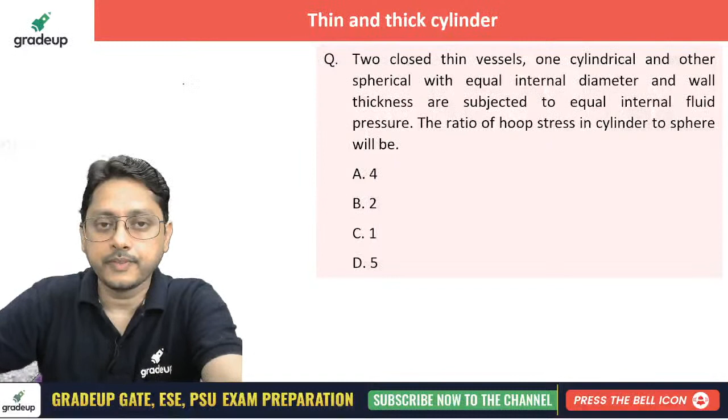What is the hoop stress? One should always remember: for a cylindrical vessel, what is the formula for hoop stress? If you're getting confused, is it PD by 4T or PD by 2T? Remember that hoop stress is always more. So hoop stress for a cylindrical one is PD by 2T, and the longitudinal stress for the cylindrical one is PD by 4T.

For the spherical one, it has the same longitudinal as well as hoop stress. Spherical has the same value in both directions. So whether you talk about longitudinal or hoop stress for spherical, it has only one value, that is PD by 4T.

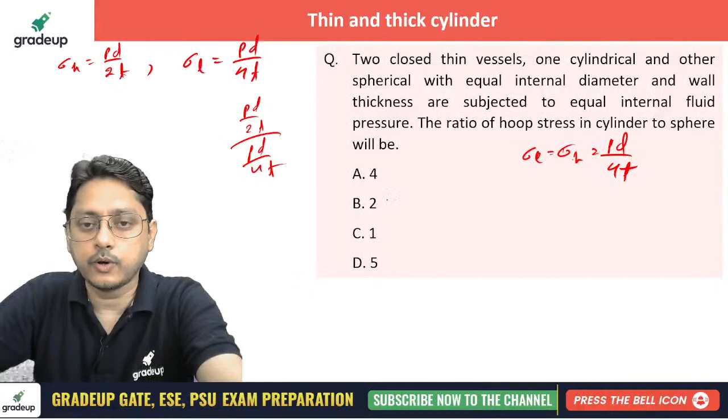Now what is the ratio of hoop stress in cylindrical to spherical? Hoop stress in cylindrical is PD by 2T, divided by PD by 4T for spherical, and finally you get 2. Yes, absolutely correct.

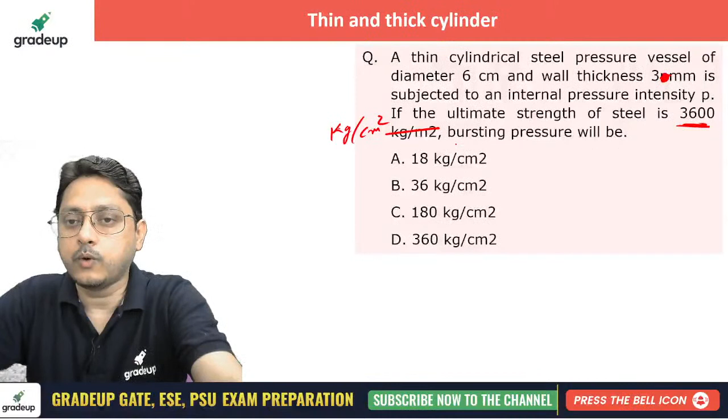A thin cylindrical steel pressure vessel of diameter 6 cm and wall thickness 3 mm is subjected to an internal pressure intensity of P. If the ultimate strength of the steel is 3600 kg per centimeter square, then what will be the bursting pressure? What is the maximum internal pressure which you can apply there?

Just now I told you that for a cylindrical vessel, the hoop stress is nothing but PD by 2T, and the longitudinal stress is nothing but PD by 4T.

Now the cylinder, if you are talking about, will be made up of only one material. So the problem is that if it's made up of only one material, either you go for the hoop stress or the longitudinal stress over the element here. The failure will occur only at 3600, that is the ultimate maximum which you can apply. So if you apply any pressure, the maximum that develops is your hoop stress. So let us do the designing utilizing the hoop stress only. Are you able to understand that?

If you increase the constant pressure, with diameter and thickness all the same, between hoop and longitudinal, always the hoop stress generates more for a constant pressure. For the internal pressure, always the hoop stress will be generated more. So do it for the hoop stress only.

Now instead of the hoop stress, keep your ultimate or final value which you can maximum apply. The maximum stress which you can apply is nothing but 3600 kg per centimeter square. The internal pressure is asked to you.

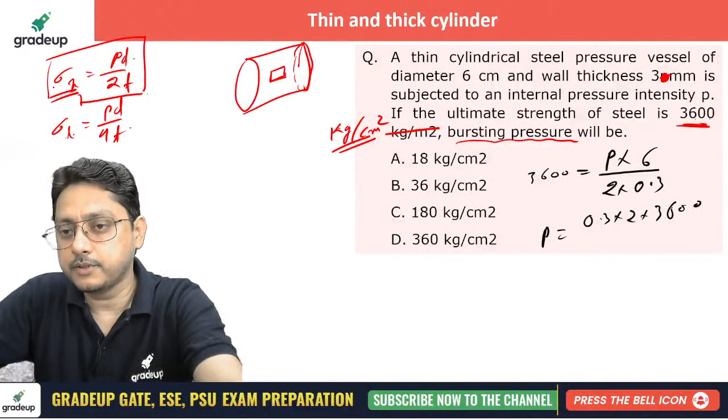The dia is given as 6 centimeter. Dia is 6, right? Okay, 6 centimeter divided by 2, into 3 mm is the thickness, you can write down as 0.3. If you calculate from here how much you are going to get: 0.3 into 2 into 3600 divided by 6. So you will get, 360 kg per centimeter square.

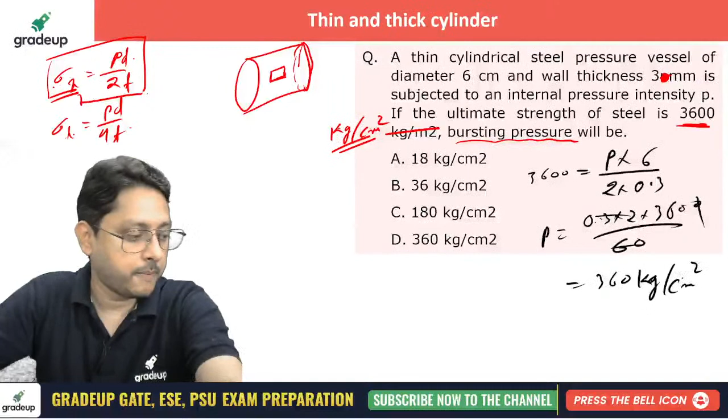That's all. So remember that it is always to compare with. These are the easy problems. Now try this one. These were the easy problem, and before trying it, please share it.

A 10 mm thick cylinder. Now this is a thick cylinder shell made up of steel, has a maximum permissible tensile stress of 140 Newton per mm square. The efficiency of the longitudinal and circumferential joints are 65% and 35% respectively. Determine the maximum permissible dia of the shell if internal fluid pressure is 3.5 megapascal.

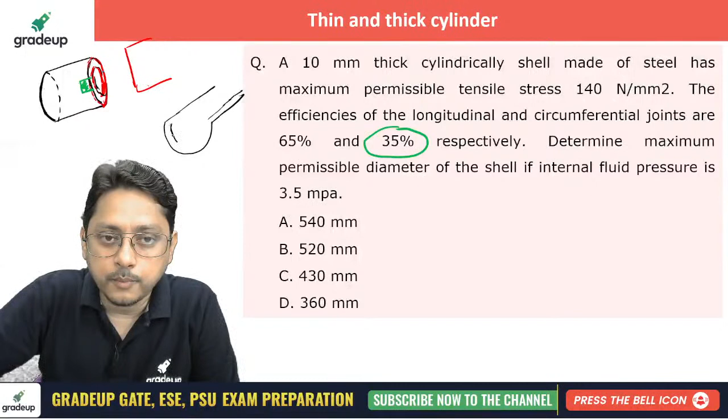And if you are talking about the hoop stress, now if you are talking about the hoop stress, just let me draw another diagram. If you are talking about hoop stress, then a longitudinal joint efficiency matters to you. Are you able to understand this? First of all, you should understand that a longitudinal joint efficiency matters to you for hoop stress, and a circumferential joint efficiency matters to you for longitudinal stress.

So if you consider any element here, this is one of the elements you are going to consider, maybe here. Now here the hoop stress will be transferred completely, up to the material strength, if you have a nice longitudinal joint. Are you getting my point? Now if I'll be writing down the equation, I'll write it down now.

The hoop stress, now this is the permissible. Instead of the permissible, if you write down here, but see, this is permissible, right? Hoop permissible. The permissible for a material is same for both, since it is made up of the same material. Of course, the material's permissible limit will be the same.

For the hoop, I will multiply with the efficiency which is there in the longitudinal direction. So efficiency in the longitudinal direction is the permissible limit you have now. And for the hoop, you already know that is PD by 2T. Are you able to understand that?

Another equation, if you write it down, is your longitudinal stress for the permissible. These are same. Permissible limit for the hoop and longitudinal both are same, right? Now here you will be writing down the efficiency which is there in your circumferential. That is now PD by 4T. Use these two equations. Are you able to understand that? Please let me know.

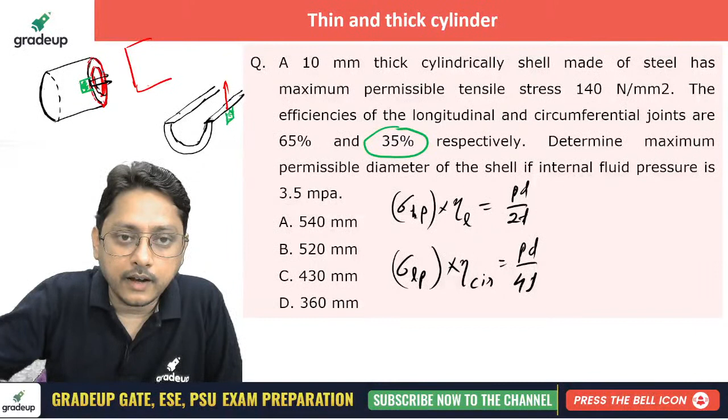Very important. This is your element. Over the element, here you have a longitudinal stress, and over this element you have a hoop stress. This is sigma H and this is sigma L. Is it clear? See, solution is okay.

One can do the solution. The main thing is whether you are able to understand it or not. Now, just do that one.

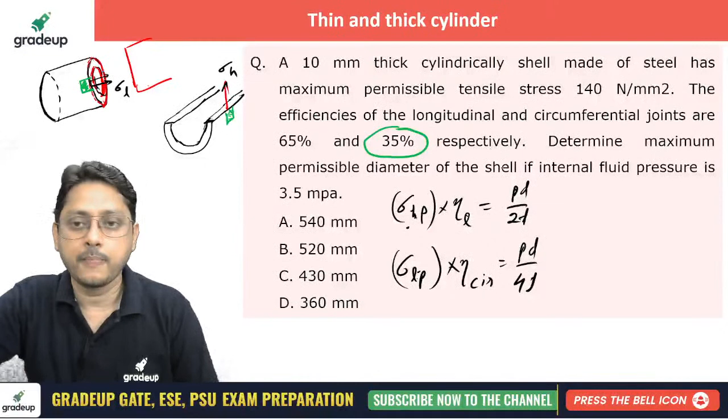That's simple. A 10 mm thick cylindrical shell made up of steel has maximum permissible stress of 140. Put 140 here, 140 here. Efficiency you have given here and here. Then you have to determine the maximal permissible diameter. The diameter you will now just calculate. I'll calculate just now.

First keep it in equation 1. So permissible is 140 multiplied by efficiency in the longitudinal direction, which is 65%. Do not get confused with the longitudinal and circumferential word. Efficiency in the longitudinal is 0.65. That is the maximum stress which you can apply in the hoop stress.

This is your hoop stress. And this is your longitudinal joint. Here is your longitudinal joint, either maybe through welding or maybe some kind of arrangement, right?

Into 0.65. Then pressure, internal pressure given as 3.5 megapascal. I will not change it because it is Newton per mm square, into D divided by 2 into thickness, given as 10 mm. Now you calculate how much D you are getting from here. That is 140 multiplied by 0.65 multiplied by 20 divided by 3.5, and you are going to get 520 mm.

Use the second equation also. Keep the values here. That is 140 into 0.35 equals to 3.5 into dia divided by 4 into 10. How much will you be getting here? That is 140 multiplied by 0.35 into 2, divided by, you will get 560.

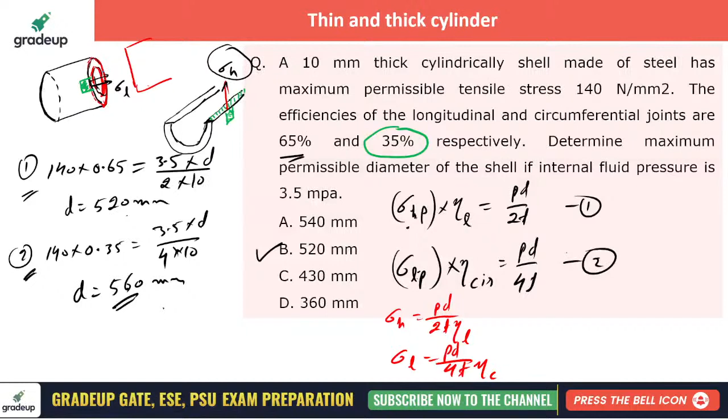Okay, next one. Here is your next one. What is that?

A thin cylindrical shell of internal diameter D and thickness T is subjected to internal pressure P. The change in diameter - can you do this one? What will be the change in diameter?

Okay, see here, the change in diameter—actually you are searching for delta D. I'll say that is the change in perimeter.

Suppose this is your cylindrical shell, and consider one element over here. That element will have a hoop stress as well as longitudinal stress, right? Take the element out. This is the state of stress it has. In the diameter wise direction, it has hoop stress, and in the longitudinal side, it has longitudinal stress.

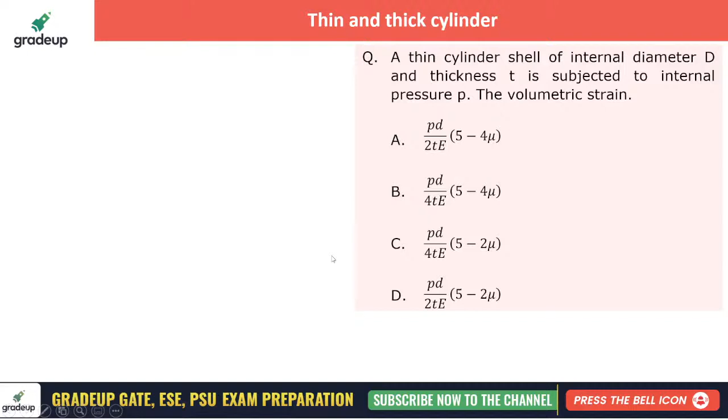Now they all are like—what will be the volumetric strain? Can you tell me which one is correct here?

Yes, I'm just waiting for your comments. What will be the volumetric strain? Yes, Rahul, actually you are correct. Yes, all of you are, I hope, correct. All of you are correct.

So if you find the volumetric strain, this is twice your diametric side and a single side of your longitudinal side, right? That is nothing but the circumferential strain you have. So already you have calculated the circumferential strain, which is PD by 4TE. So twice of that is PD by 4TE.

Times (2 minus mu). And what is your longitudinal strain? What is your longitudinal strain? So your longitudinal strain will be—just a moment, did I say something wrong?

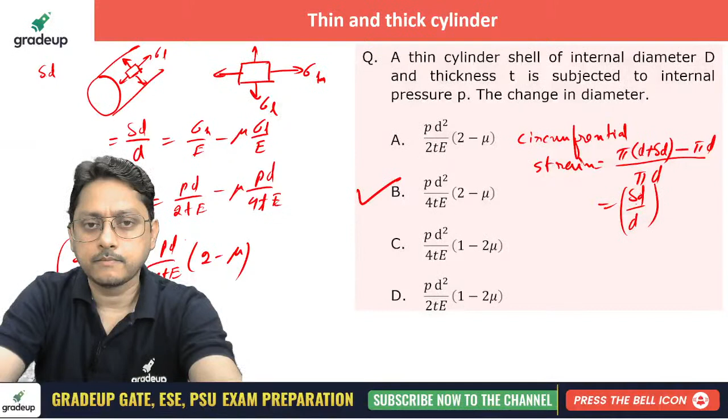So simply if you do this one, twice of that hoop strain, how much do you have? What is your longitudinal strain? Strain in the longitudinal direction—what is that one?

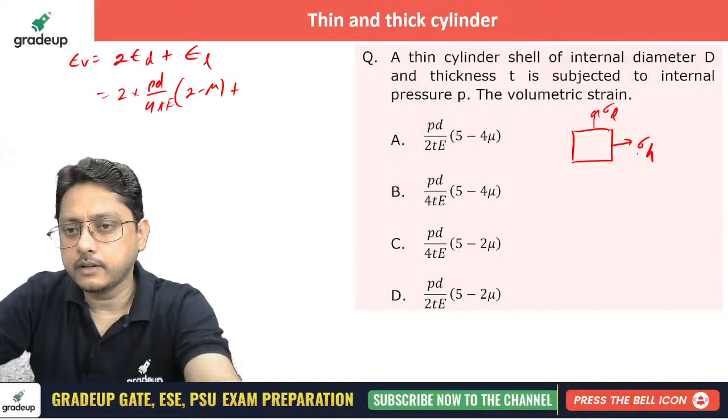Then I think you need to calculate that one also. If you have a longitudinal one here and a hoop here, longitudinal strain will be sigma L by E, minus mu times sigma H by E. Longitudinal stress already we have, that is PD by 4TE, and minus mu times sigma H by E, that is PD by 2TE.

And you will be getting PD by 4TE times 1 minus 2 mu. This is your longitudinal strain, right? So longitudinal strain will be PD by 4TE, and that is also good. You have seen what is the longitudinal strain, and how you are getting it here.

PD by 4T, you keep 1 minus 2 mu here. Just calculate and simplify this, and you will get PD by 4T times 5 minus 4 mu. Simplify this one, that's all. PD by 4TE, see here, 2 times 4 minus 2 mu, plus 1 minus 2 mu. See, 4 plus 1 becomes 5, and 2 times 4. Did you get that? Any doubt, please let me know.

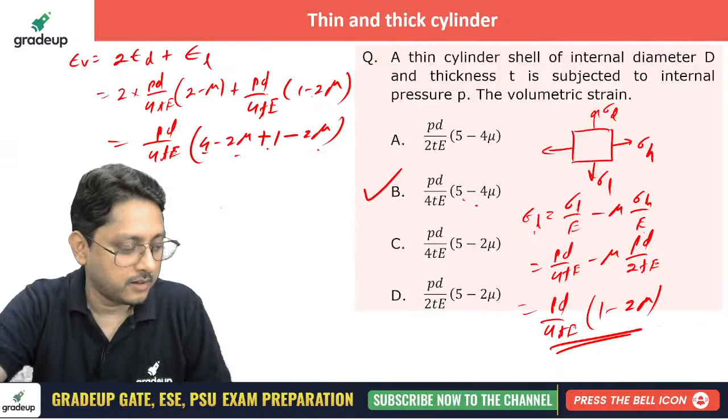Now what about this one? For a thick cylinder, the radial stress, see this one, I generally recommend, this is Lame's equation. This is just so that you remember it. Based on this, sometimes you may get the numerical also. This is your Lame's equation for your thick cylinder.

What is the equation of radial and hoop stress? Can you tell me? This is first one, please do remember, because now we are going to solve the problem based on this Lame's equation. Yes, Rahul, absolutely correct.

The first one is your radial stress. Radial stress, you know that already, right? If you have a thick cylinder, the radial stress in the direction of radius, internally, if P is the internal pressure, the internal radial stress will vary. How will the radial stress vary? I hope all of you have already studied and gone through this.

Suppose this is the internal pressure. The radial stress, if I am talking about the internal one, will be maximum here, that is nothing but P, and it will be 0 at the outer one. Actually 0 means atmospheric, but we are considering it as 0 as a basic assumption. So now internal pressure is maximum internal radial, and outside you have 0. That will make your numerical easy, because it provides the boundary condition.

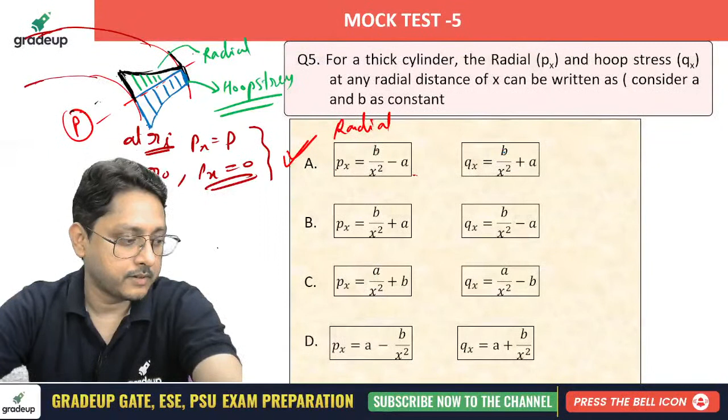Simply use these boundary conditions, calculate the value of A and B, and whatever is asked can be presented. That is the kind of problem you can get for the thick cylinder. Are you able to understand this? Now here is the problem.

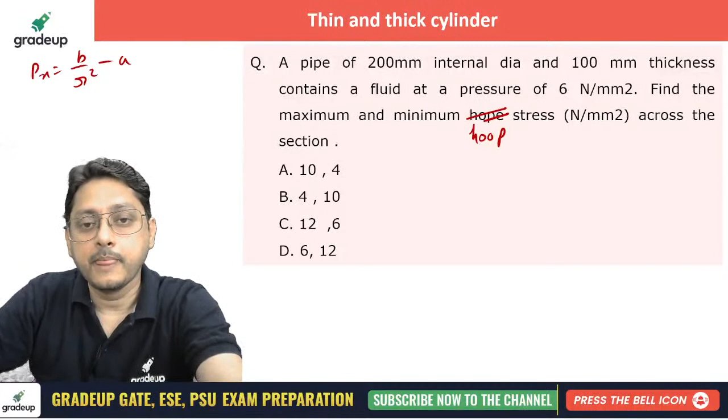Can you do the calculations? I told you the radial stress is nothing but B by r square, where r is varying from internal radius to external radius, minus A. That is your radial stress calculation. And the hoop stress I have identified by Q, someone can write it as F also, doesn't matter, B by r square then plus A. That is for hoop stress.

What we'll do now? He's asking about the maximum and minimum hoop stress. Can you calculate that? The way I told you, use the boundary conditions from the previous slide to calculate the value of A and B, that is Lamé's constant.

He's asking what is the maximum and minimum stress. Calculate the values by using this. So what will be the value of A and B? So I can say that these are the diameters they have given.

So at internal radius, r equals 100, since you have a 200 mm internal diameter, at r equals 100, your radial stress px will be how much? Internal pressure whatever you have, that is 6 Newton per mm square. Agree or not?

And if the thickness is 100, the outer radius will be how much? Outer radius will be 200, right? At r equals 200, what will be your radial stress? That is nothing but 0. Now use these two in your equation px.

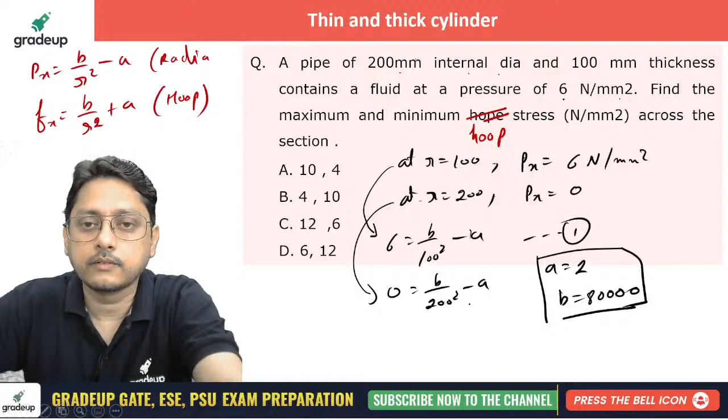So now calculate your hoop stress. Hoop stress will be, what is the value of b? That is 80,000 divided by r square. Now at the internal radius you will be getting maximum, so I should write down maximum hoop stress.

Max. So if you are going to get the maximum one, use the internal radius, that is 100. So 100 square plus a value is 2. How much will you be getting here? Maximum 10 Newton per mm square. 100 square, the 1 2 3 4 will get cancelled, 8 plus 2, that's 10.

And minimum hoop stress you will get how? 80,000, same constant value, divided by outer radius. Outer radius is how much? 200 square, since 200 mm is the outer radius, plus 2. How much will you get? Here you will get 2, plus 2, that's 4 Newton per mm square.

Now the values are 10 and 4. The maximum and minimum hoop stress are 10 and 4. If you have any doubt, please let me know. Are you able to understand this?

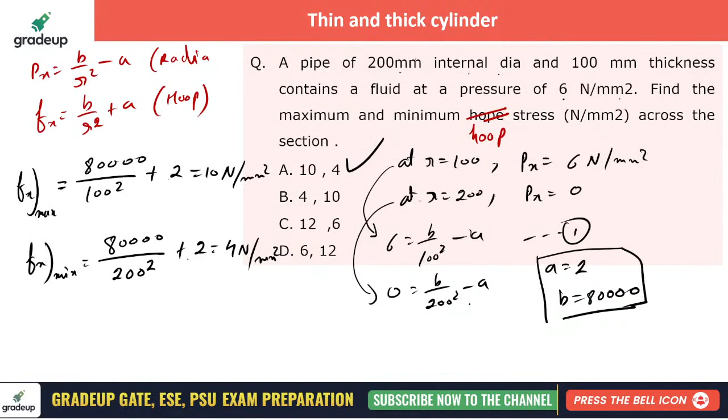Once again, you will get the same type of problem. I have another one, can you do this? Here also this is hoop stress, not radial. Now this is the same kind of problem, same concepts will be required here. Instead of going for the same problem again, let's go for another problem with the same concept, it will be better.

Find the thickness of metal necessary for a steel cylindrical shell of internal diameter 200 mm, to withstand an internal pressure of 50 Newton per mm square.

Right, this is your 200 mm. Please use this one to withstand internal pressure of 50 Newton, and the maximum hoop stress in the section is not to exceed 150 Newton per mm square. So maximum hoop stress is restricted.

This time the boundary condition, the way he has provided here, you are now supposed to utilize that one. He has given the maximum hoop stress, right?

Find the thickness of metal necessary for a steel cylindrical shell of internal dia 200. You don't know what is the thickness here. Can you do that? Can you do this one? Try this one.

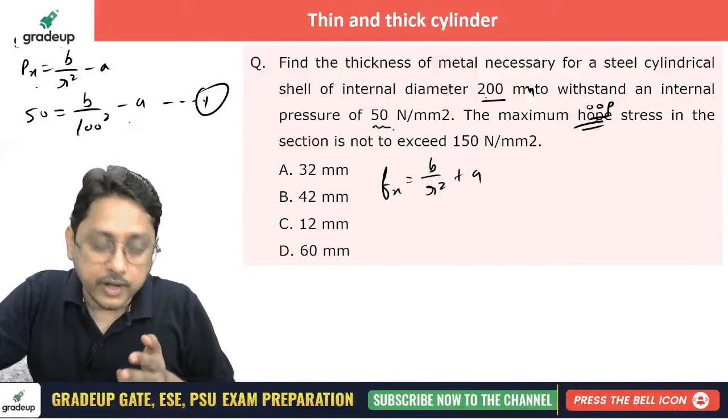Now you will be asking me, sir, can you write down another equation? If I write down another equation, B and A are unknown. If I write down only the other boundary condition for a radial stress, what will happen? See, B and A, two unknowns I have. Another unknown is our external diameter, that is outer radius.

I don't have the outer radius because I don't know the thickness of the material, right? So I will be having three unknowns. So only with the help of that boundary condition, which I told you in the previous problem, one cannot solve this problem. So that is why they are very smart. They have given another boundary condition, that the hoop stress in the section should not exceed 150 Newton per mm square.

See, it is not important for you how you are solving it. It is important that what is your approach. After reading out the question, what exactly you are thinking. So generate a nice approach for that one, right?

Now, the maximum hoop stress, that is why they have given that another boundary condition, right? Okay, you got it, 42 mm, that is great. So 150 is the final one, and where will the maximum hoop stress be? The maximum hoop stress will be at internal one, right? So B by 100 square plus A.

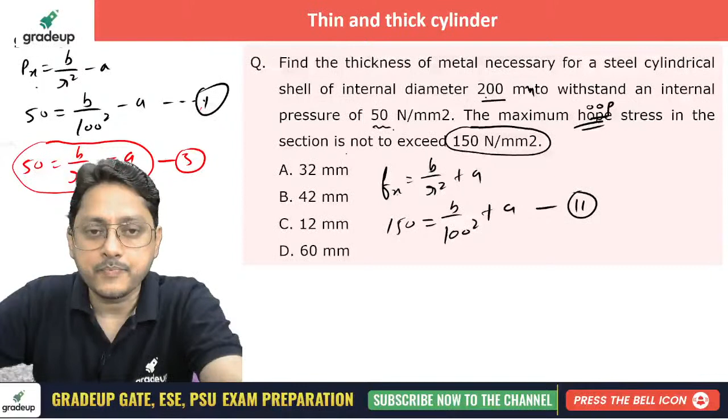Now here I can use these two equations. Are you able to understand why I have not utilized the equation for 50 equals to B by outer radius square minus A? I am not going to use this one. These two are not the equations to use, because by the red pen, whatever I'm writing down, try to understand that if I use this one, I have unknown B, A and R naught, and only with the help of two equations I cannot solve this.

So it is better to use equation 1 and 2. If you use equation 1 and 2, you will be able to get the value of A and B. Now what will be the value of A and B? Using equation, solving equation 1 and 2, what is the value of A and B you will get? Can you tell me what value of A and B you are getting?

What value are you getting? A is 50 and B is 10 raised to 6. Now use these two values.

Should I write it down? Use it in equation 3. You have 50 equals to B value. You already have 10 raised to 6 divided by R naught, which I don't have. Outer radius I don't have, minus A. A already you got as 50, and R naught, how much are you getting it here?

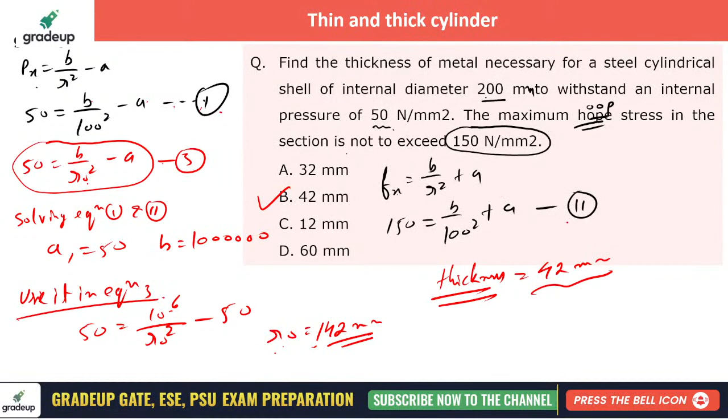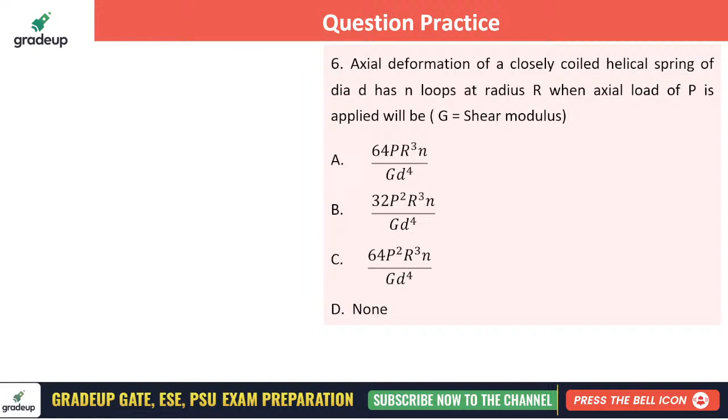Now what about this one? Axial deformation of a closely coiled helical spring. This is a very interesting problem. A closely coiled helical spring, how will you solve this one?

For that, remember a few things. If axial deformation is asked, or they may ask you the strain energy in the helical spring, sometimes I have already given that. So they can ask about the strain energy, they can ask about the axial deformation. How will you remember that? Because if you can remember the formula, that's great, that's always great. But if you have not remembered it, how will you use this one?

What will you do? Can you write down something? Yes, I hope you are doing good.

If you cannot remember the formula, follow my steps now. You know what is the strain energy for an axial bar? All of you please be ready. What is the strain energy for an axial bar loaded with axial force? Simple, P square L by 2AE. Correct, no? From here also I used to remember it, I don't remember this one otherwise.

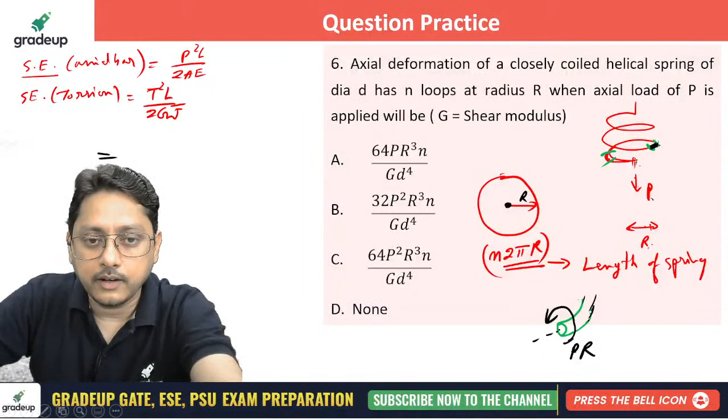Now T also I got it. Just keep all these values here, just put all the values here. If you'll keep all the values here, T is what? P into R, so it will become P square into R square. L is what? N into 2 pi R, N into 2 pi R divided by 2G.

And J also you can write it down. It is solid, no? So J is what? Polar moment of inertia, isn't it? That is nothing but pi d4 by 32. Simplify this one, how much you'll get? 2 will get cancelled, and you'll get 32 P square R cube, N divided by G D4.

This is what? This is your strain energy. Now, as per the Castigliano, the axial deformation.

See what Castigliano says, that force applied in this direction. You are interested to know what is the deflection, the axial deflection delta. If you want to know what is delta, as per Castigliano, delta, the axial deformation, is nothing but del U by del P. Agree or not? Del U by del P.

You do that one, del U by del P here. It will become 64 P R cube N divided by G D4. Now, either strain energy is asked to you or the axial deformation is asked to you, you will always be able to find it out. No need to remember that. Even though if you are forgetting sometime, you will be able to do this.

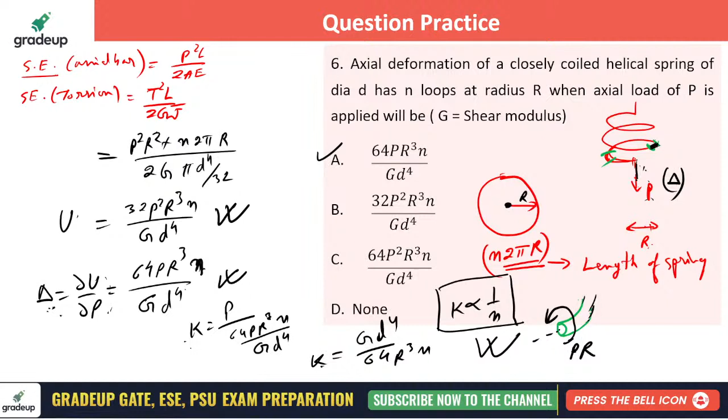I hope so. Now here is another problem you have. The buckling load for a column pinned at both ends is 10 kilonewton. If the ends are fixed, the buckling load changes to. These are just very easy problems. So P critical, you already know that. What is that? What is the formula? Remember it, try it.

What is the formula for P critical for the column? It is pi square EI by L effective square. If it is the buckling load for a column pinned at both ends, the length will be L itself, right?

Now P critical is given, that is nothing but 10. L effective is already L if it is pinned at both positions. Now if the ends are fixed, P critical dash is pi square EI, only L effective will get changed. If fixed at both ends, the effective length becomes L by 2.

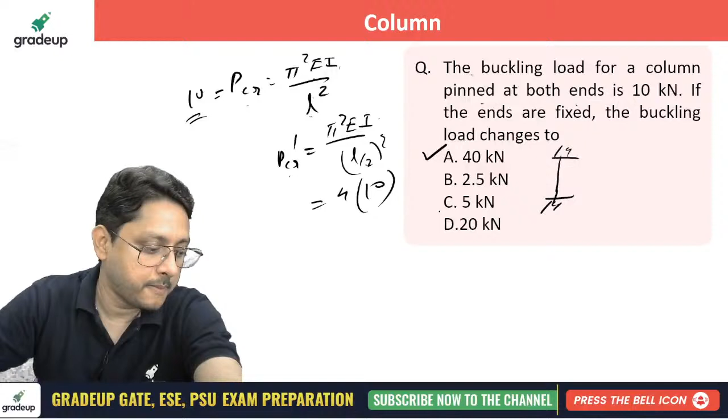Keep that L by 2 here, whole square, it will become 4 into pi square EI by L square. Now pi square EI by L square is already 10 given here. Keep that value 10, and P critical dash will become 40 kilonewton.

For a circular column having its end hinged, the slenderness ratio is 160. What will be the L by D ratio of the column? For that you should know the relation. He is asking the L by D ratio but has given the slenderness ratio. What is the slenderness ratio here?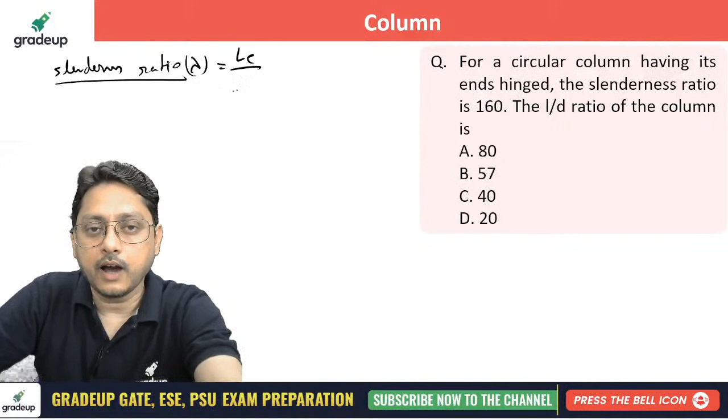Slenderness ratio we represent by lambda, that is nothing but L effective by R minimum. R minimum is the radius of gyration. For a circular column you need to calculate the radius of gyration, which will be under root of I minimum by A.

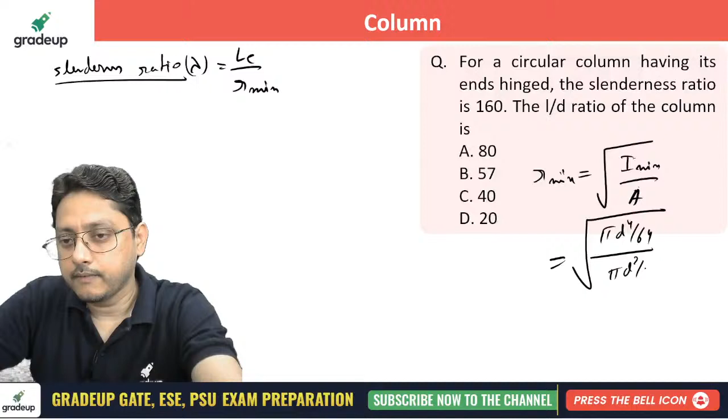For a circular solid shaft, circular column, what is I minimum, the moment of inertia? It is pi d^4 by 64. And the area is pi d square by 4. Now simplify this and you'll get d by 4. This is your R minimum.

Keep it here, it will become LE by R minimum, and for a column with both ends hinged, L effective is also L. R minimum you can write as d by 4, so it becomes 4L by D. That is given as 160, so L by D will become simply 40. The ratio will become 40.

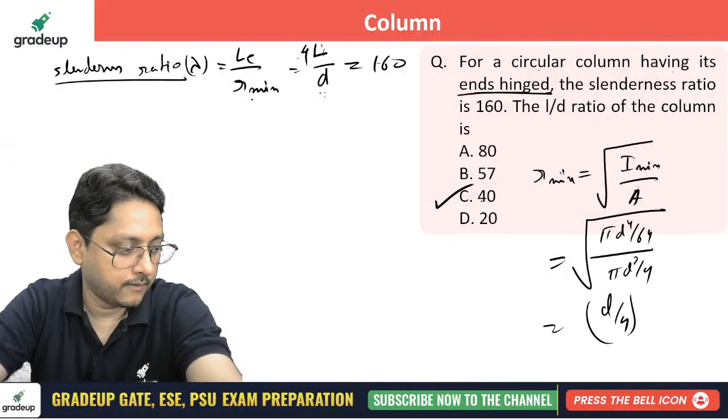A strut of cross section 200 by 100 and length 3 meter is subjected to a gradually increasing axial compressive load till buckling takes place. Using Euler formula, determine the critical load here. Can you do this one?

Cross section is given 200 by 100, where 200 is your width, it's a strut. So which one will you use now? This is suppose your 100 and this is your 200. Which I will you be using? I minimum, isn't it?

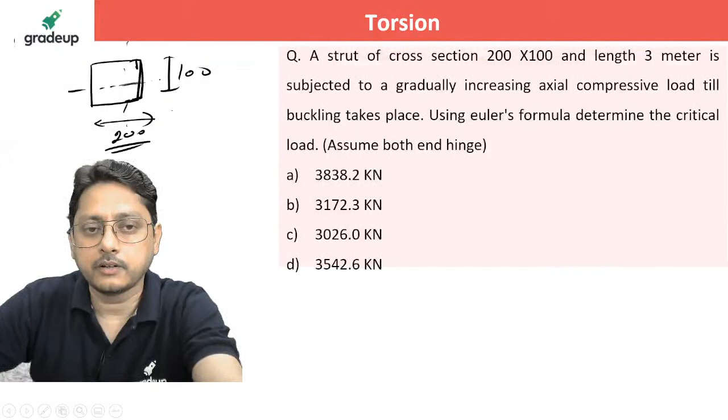You will be having I, BD cube by 12, for both IXX and IYY. The buckling always occurs about the minimum I, so you use the minimum one. I minimum is BD cube by 12, so instead of this, use 200 into 100 cube by 12.

Then put the value of E, not given... I'm sorry, I'm really sorry. Maybe it is here 210 GPa. I'm sorry for that one.

210 GPa, Pi square, E value is 210 into 10 raised to power, change it to MPa, Newton per mm square. Multiply by I value, whatever you have, 1 by 6 into... Pi square into 210 into 10 raised to 3, that is megapascal, Newton per mm square, everything in mm only. Into I is 1 by 6 into 10 raised to 8 divided by L. The length of the column is 3 meters, so use 3000 as mm, L square. You will be getting around 3838.17 kilonewton. This is actually quite simple and easy.

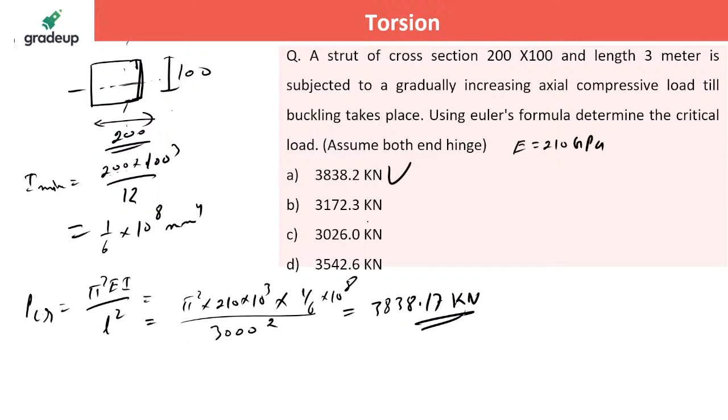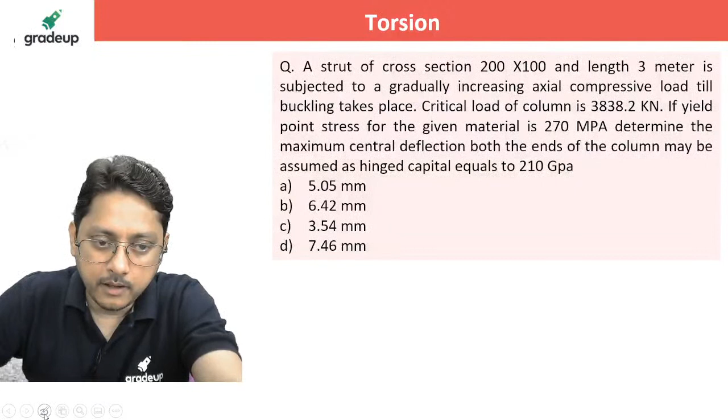Next one is quite interesting, very interesting. You have already calculated the value of critical load. Read this problem, this is quite more interesting than the previous one. Previous one was straight, just put the values, calculate. Now the critical load is given with all the same information. It is kind of the same problem here. The critical load, whatever you have calculated, is now given here.

But what he's asking, if the yield point of stress for the given material is 270 MPa, sigma yield value is given, determine the maximum center deflection if both ends of the column may be assumed as hinged. And not capital, this value is e. That's all, what will be the maximum deflection? Determine the maximum central deflection.

What is the meaning? He's saying suppose you have a critical load here, that is P critical, and this was your column position. If both sides are hinged, then what is the maximum central deflection? That is the value of e. He is asking about that e. What condition he has applied here? That you have a maximum yield of 270 MPa, material yield will be 270 MPa.

Yes, I'm good. I'm good.

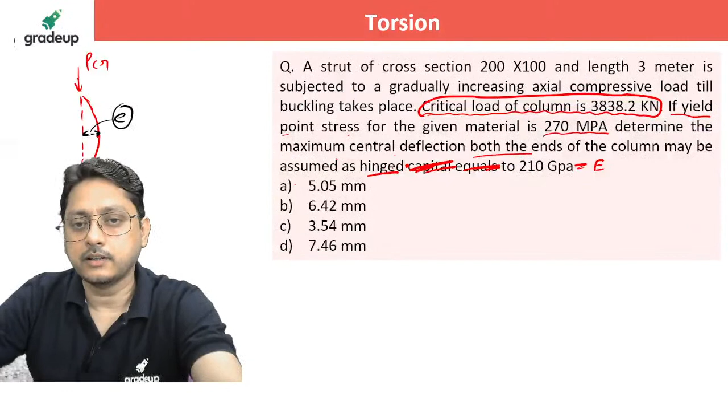Now first of all, try to understand this problem. What he's asking now - what you will do with this 270 MPa? That is the question now. What you'll do with the 270? Understand it: if you have a buckling here, at this point where you will be having maximum stress.

Now this is your column position. At this position, you will be having P as well as P into e, both you will be having. If once your column is going to get buckled, your one face will be subjected to compressive stress, and one face will be subjected to tensile due to the bending, and another face will be subjected to compressive once again. The problem will always be where you have maximum compressive, right? Because tensile and compressive get managed at one position, but maximum compressive should not get increased. So maximum stress generated by these two is nothing but compressive stress directly due to P, and a bending stress.

Now P by A is your compressive one, and the bending stress which is generated by that moment, both must not go beyond 270 Newton per mm square. Are you able to understand this? The axial stress and the bending stress should not go beyond a limit. Material should not get yield.

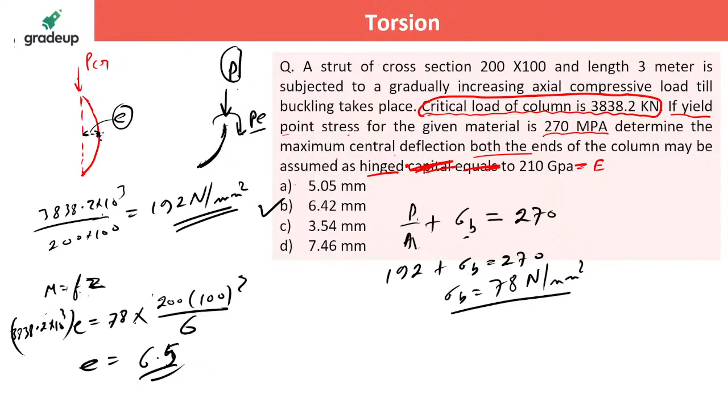Did you get that? That is how you can use the column also, right? Sometimes you may feel column problems are easy, but they're not that easy. So meet me tomorrow again for the deflection problem - fantastic deflection problems will be there tomorrow, not only easy, but moderate and tough. All the problems I generally bring down so that you will understand and get the feel of GATE. GATE doesn't provide you very direct questions.

Yes Neha, you are absolutely correct, 6.7 I am getting it, I am getting 6.7, so just close to that value is 6.4, I have marked it. Actually I'm also getting 6.7. So GATE always doesn't provide easy problems, right? 1 mark and 2 mark problems are there, some conceptual problems will always be there which require calculation-wise more time investment, and concept-wise also.